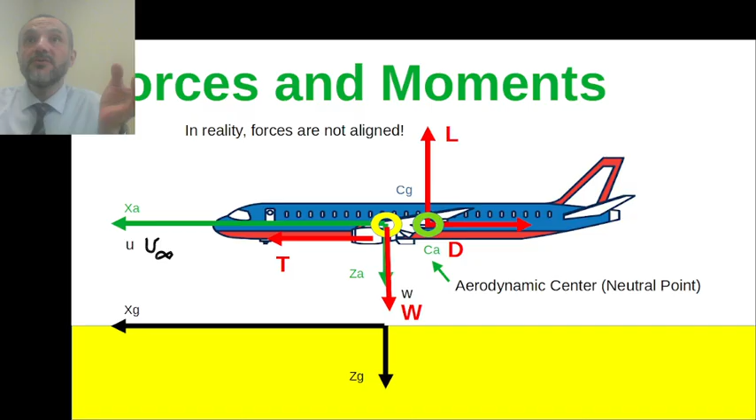Starting where we left off yesterday, we quickly reviewed the coordinate system, the forces and moments acting on the airplane, and reminded ourselves of things like the static margin and that the position of the CG is always changing, but as long as it's within a safe zone, it's okay, we can still fly.

The characteristics of the flight will change with the change of CG position, but it will not become catastrophic. I'll start with the lift of the whole airplane, but because we may come from different backgrounds, or the previous professor used a different approach, I'll quickly review what we already know about lift so we can build on it and do calculations for the whole airplane. This is what we'll try to do today, inshallah, and it will probably extend to next week to cover more of what you already know, but collect it together.

Generally speaking, when air or any fluid flows over any given body, forces start to be created due to changes in pressure on one hand, and on the other hand, some are created because of viscosity. In many cases we just ignore viscosity because it's quite low in air, but probably you already know that without viscosity, we wouldn't have been able to fly.

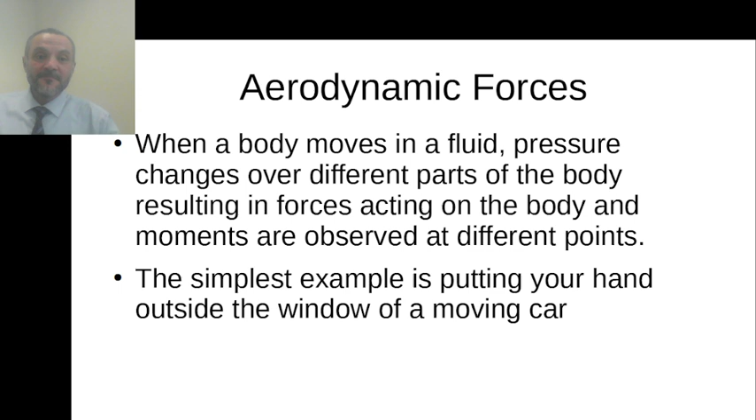Let's imagine you're trying to put your hand outside a moving car. I'm not sure whether the law allows this or not, but even if it doesn't, as a human being you have the right to try it. It's a very nice experience most of us have had, whether as children or adults.

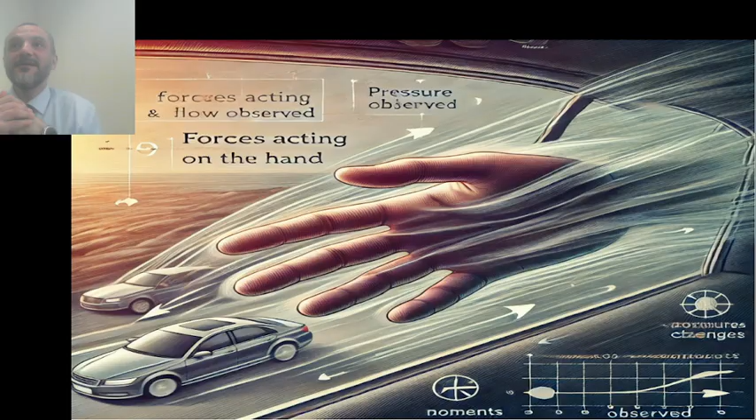Until today I like very much to get my hand outside the window and play around with moving my hand in the air. What happens is that as the air passes around your hand, it starts pushing on some parts more than others. When it pushes on these parts, that's what we call an increase in pressure. On the other parts, the velocity increases, and due to Bernoulli's equation, pressure decreases, so a negative change in pressure occurs. Adding these up, a positive increase on one side and a negative increase on the other add up to a total force.

The fundamental force for any flow of fluid on any body is drag. This is sad for us, we hate drag usually, all the time. But whenever any body is moving in any fluid, drag is created.

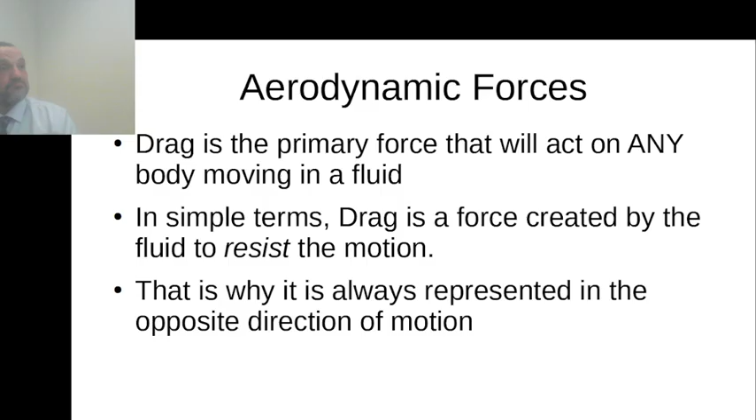Is it associated with lift? Doesn't have to be. So drag is the fundamental force, we cannot get rid of it.

Drag is defined in many ways, but the one we care about in flight and aerodynamics is the force that's parallel to the airflow and in the direction of the airflow. So if it's in the direction of the airflow, it's against the direction of motion of the body, right? That's what pushes your hand if you put it completely against the airflow, it pushes your hand backwards. This is what resists the spoon while you're trying to mix sugar with your tea or coffee, that's against the flow.

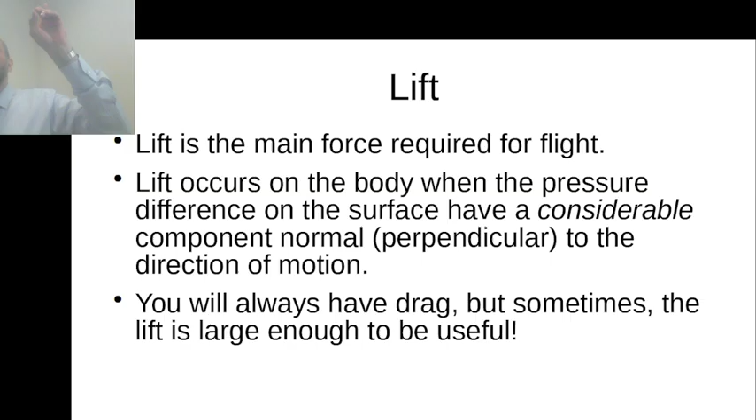The other force, which we always hope to have as much of as possible, is lift, because lift is what's responsible for flight. Without lift there is no flight. The definition of lift, as per what Sir George Cayley defined in 1799, is that it's the resultant of the force normal, or perpendicular, to the airflow. This is what we are seeking all the time, and that's what's used to raise or pull the body against gravity.

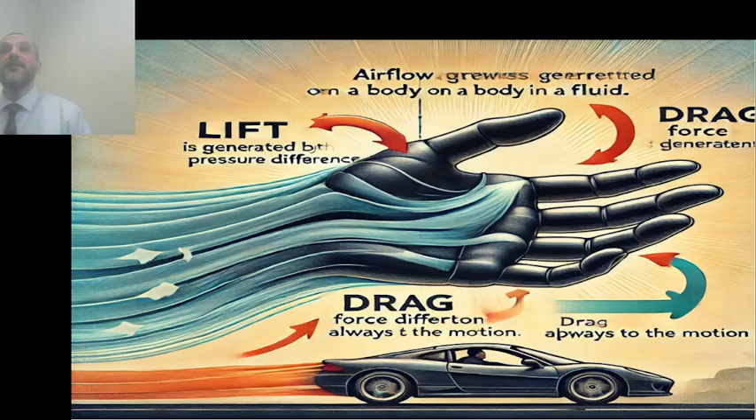Well, does it always pull it against gravity? You may want to create negative lift, right? But generally speaking, when we say lift, it's supposed to be upwards. Negative lift exists, yes, negative lift is useful, believe it or not. As we will see in detail, sometimes we deliberately use it to create negative lift.

Okay, so the wing, on the other hand, is any body that's designed with the purpose of mainly creating lift.

Of course, for generalization, we can assume that anything moving in any fluid can be called a wing. But this is too broad of a definition to be useful for us. When we say wing, we are talking about some geometry that's usually slender, thin, and tall, and its main length, which we call the span, is usually perpendicular to the direction of flight.

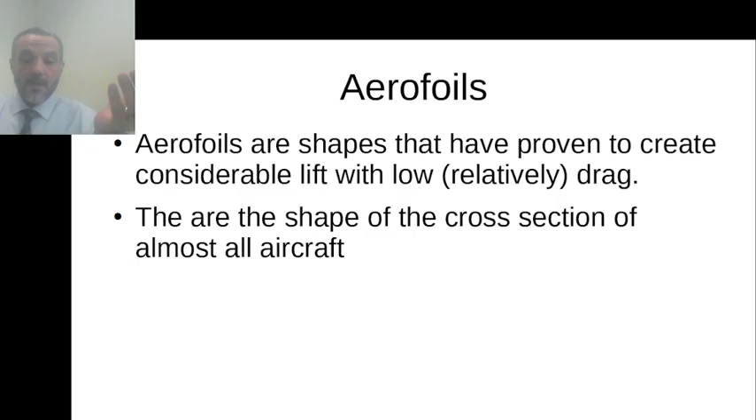This is again a narrow view of an airfoil, because for example, if we're talking about supersonic flight, many of the supersonic airfoils are in a diamond shape. But for subsonic flow, which is most of the aircraft, a diamond shape is not really that good. We need something rounded from the front and pointed from the back. Nevertheless, the broadest definition is that any wing cross section can be called an airfoil.

To draw an airfoil, given the four-digit nomination of the airfoil, you can get the airfoil right away.

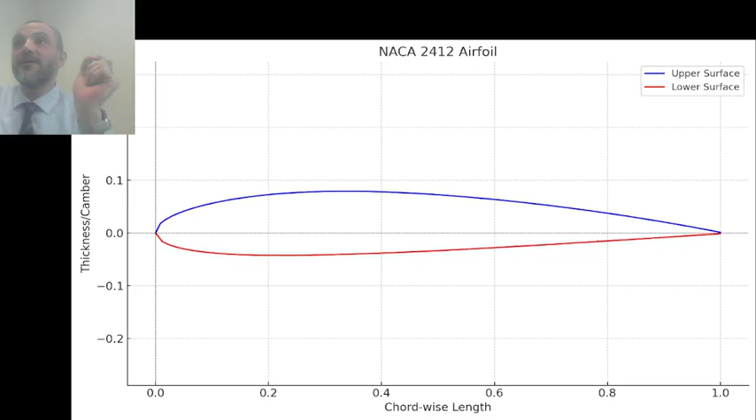There are a lot of software packages, small ones, that are very useful when analyzing airfoils. Probably the one that I love, I've been using for ages now, is Java Foil. Although sometimes it's hard to get it running, but as soon as it gets running, it's very nice in analyzing 2D and 3D wings. If you can get it on your computer, it would be a very nice tool.

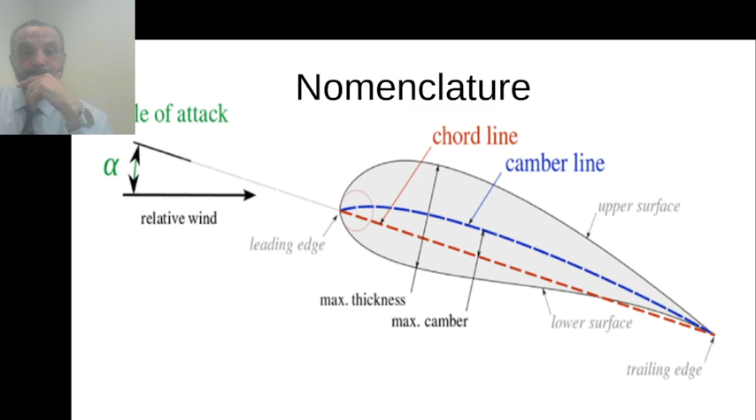I will not be repeating here what you already know about airfoils, but let me just stop and focus on one thing: the maximum lift. The maximum lift of an airfoil is something that's always associated with any airfoil. As you increase the angle of attack, you increase the coefficient of lift, but up to a limit. When you reach that limit, the coefficient of lift starts dropping.

Practice and computational fluid dynamics says that it will not be dropping forever. It will grow up again at a higher angle of attack, but that's useful for severe maneuvers for fighter aircraft. Most of our work will be focused on regular flight, either small aircraft or commercial aircraft. However, this is important to know for any wing, in order to recognize how much lift that given wing can produce. Without knowing that, you can reduce your speed forever.

Remember in the previous course, flight mechanics, you learned about V minimum, the minimum speed you can fly at. How would you identify it? By getting the maximum lift coefficient and the weight, and by that you can find what is the value of my minimum speed, below which the airplane would fall.

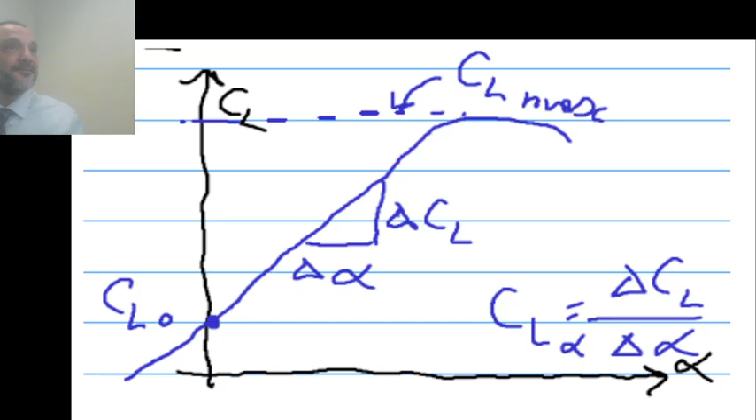It just means that the total lift I'm producing by my airplane is less than the weight. If it's less than the weight, what will happen? I will start losing altitude. I'm not falling, I'm just landing, baby. Although it's not a good idea to land at your stall angle of attack, okay? But I'm still flying, right? Remember that.

Okay, again, let's quickly review now, go from airfoil to the cross section to what we call a 3D wing. A finite wing is what we already use for flight anyway. What happens with a finite wing?

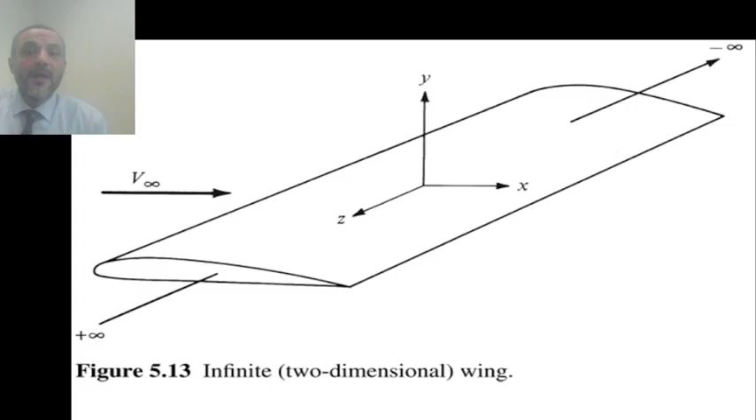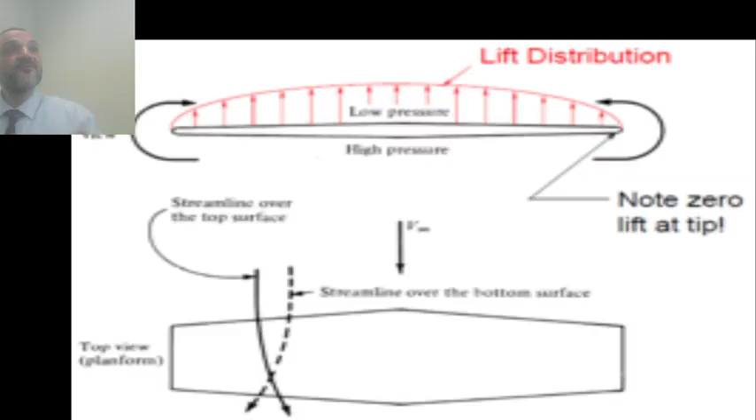One thing that causes a lot of changes is the wingtip vortices, right? It reduces the amount of lift produced by the wing. It creates a change in the effective angle of attack. It produces wakes that create downwash and upwash, which affect everything that's flying behind the wing.

And it's powerful enough to hurt someone, or even, if it's a 747 and you are very unlucky to get in the wake of a 747, even if you're riding a bus, the whole bus will go around and it's not going to be a very nice experience. That's why I would suggest you do not fight the bad guys on the wing of a 747 while it's taking off. Tell Bruce Willis that, please, because I want to meet him just to tell him don't do that again.

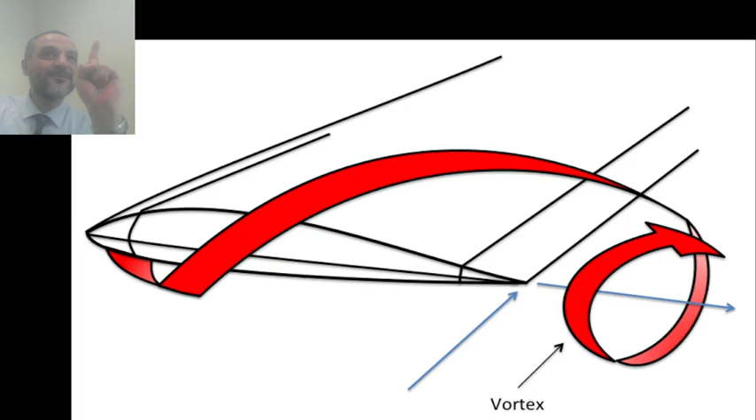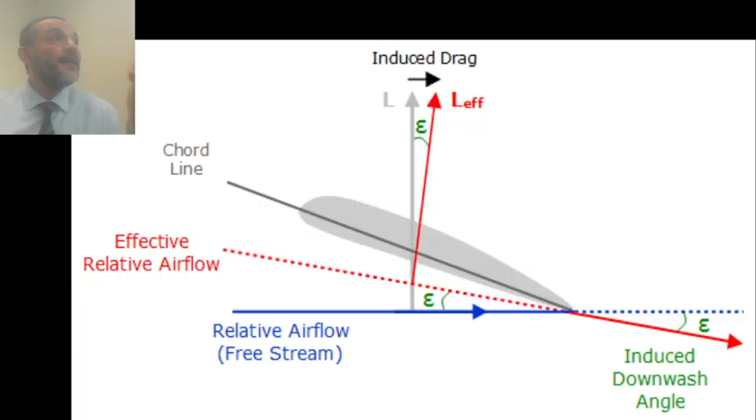Just a reminder: for the wing itself, it's affected by parts of the downwash. That's why the effective angle of attack changes, changing the direction of flow, which reflects for us as two things: a reduction in the lift and creation of what we call induced drag.

I will not spend much time now talking about winglets. You probably know the general idea. Winglets basically reduce the effect of the wingtip vortex, so it increases the efficiency of the wing and reduces the effect backwards as well on the tail.

Now, we quickly reviewed what you already know about airfoils and finite wings. Let's jump to the whole configuration, and for that I'll need to start writing or drawing, and you'll get to get acquainted with my bad handwriting.

Now we have a whole aeroplane configuration with a wing and a wing, right? A big wing and a smaller wing. We usually call them the wing and the tail, or the wing and the horizontal stabilizer, but for aerodynamics, they are both wings.

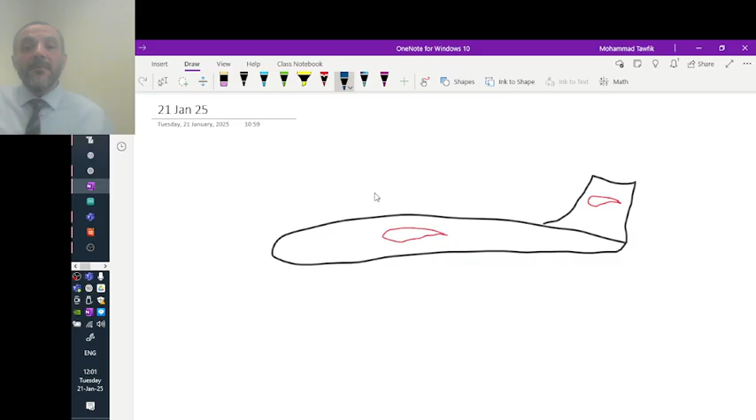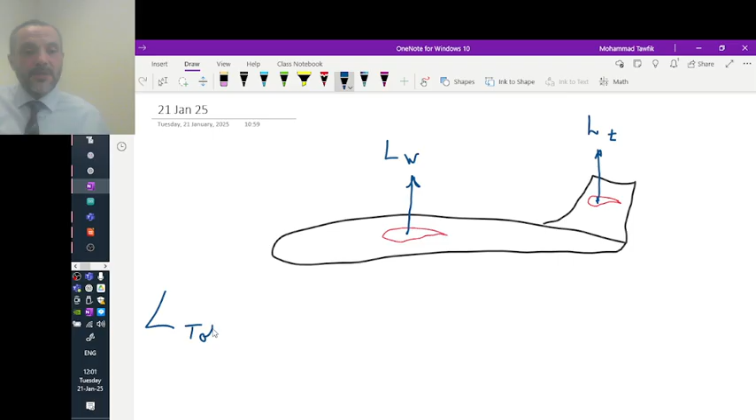I will start by something that's not always done when studying flight dynamics, but I'll just start by talking about the lift generated by the whole aeroplane. For the whole aeroplane, L total, which I will refer to as L from now on, total lift of the aeroplane, I can say that it's generated by the lift of the wing plus the lift of the tail and maybe plus the lift of the fuselage.

Can the fuselage produce lift? It can. Usually quite small compared to the wing and tail, but it can be large enough to use for flight. You have probably heard before about wingless aeroplanes, or flying, or lifting body aeroplanes. But for our case, we will just ignore this for now.

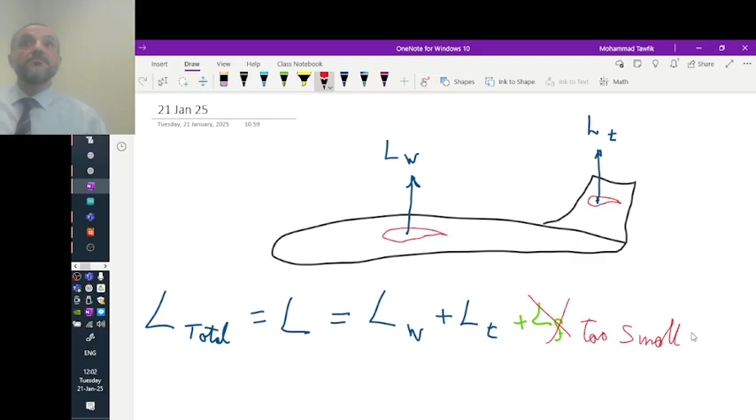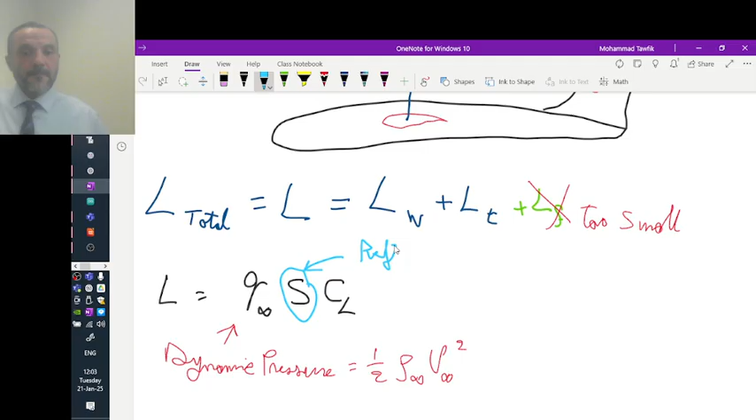The lift of the whole aeroplane is usually known as, or written as, Q infinity S CL, where this is the dynamic pressure, equal half rho infinity V infinity squared, and this is the reference area. For the airplane, the reference area is usually the wing area.

That's by choice. And the most important part probably is the lift coefficient, which is again some combination of the lift coefficient of the wing and the lift coefficient of the tail. But again, it can be generally presented as CL equals CL naught plus CL alpha alpha, where alpha is the angle of attack measured from the body reference axis and the airflow direction.

Similarly, the lift of the wing may be written as Q infinity S wing CL wing. Do you agree? Which can be written as Q infinity S wing times CL naught wing plus CL alpha wing alpha wing.

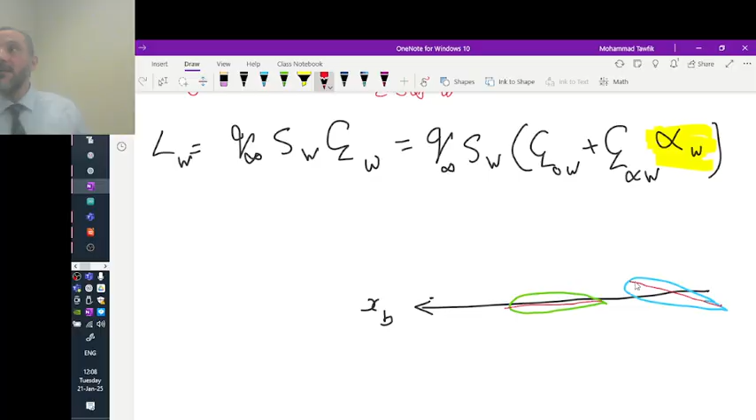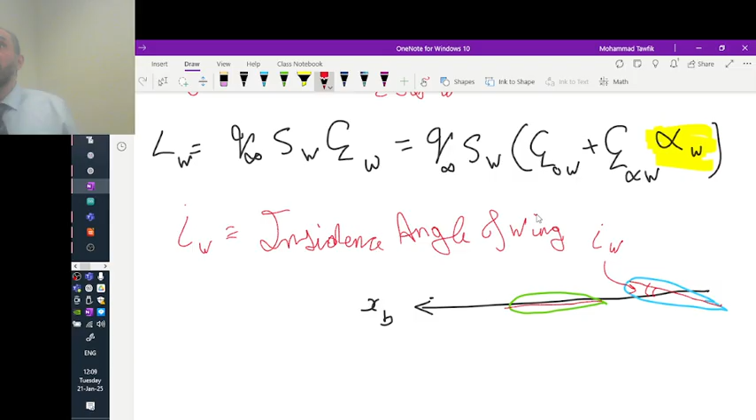So generally speaking, yes, the setting of the wing relative to the rest of the body can force us to say that there is what we call an induced incidence angle - incidence angle of the wing. This incidence angle can be set to 0 by the designer or set to some other value.

Remember, for the wing, like we said last time, we don't have a choice - the reference line of the wing is the chord line, or more generally, the average chord line. But for the airplane, the reference line is a choice. It makes a lot of sense to make it more or less parallel to the chord line of the wing - but more or less, not too much difference.

But still, generally speaking, it may have an incidence angle, which is not related - just to answer the other point of view - to where the wing lies vertically relative to the axis. Maybe a high wing with zero incidence, or a low wing with negative incidence. So the incidence angle is measured between the two lines: the chord line of the wing and the airplane reference line, or in other references, the fuselage reference line. I prefer the airplane reference line.

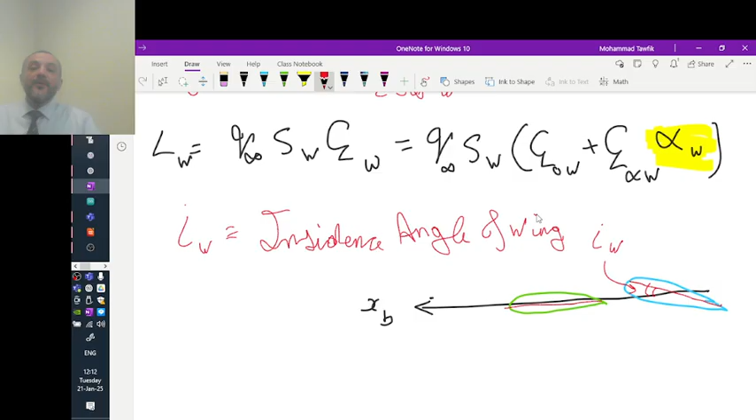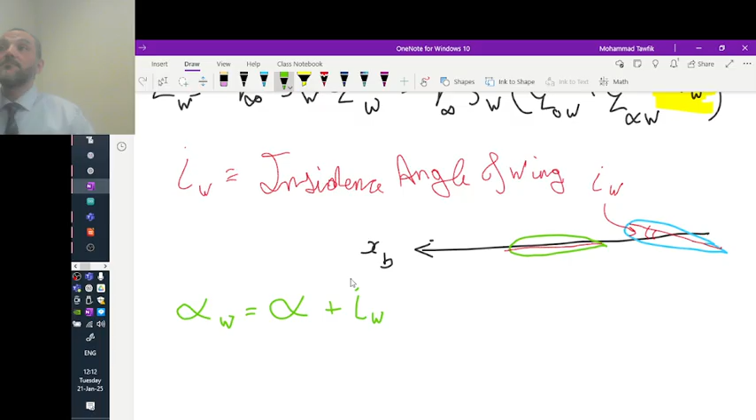Actually, now we are going to say also that the angle of attack of the wing doesn't have to be equal to the angle of attack of the airplane, right? So yes, alpha wing is different from alpha. And generally speaking, we will say that alpha wing is equal to alpha plus i wing.

Similarly, when we write the lift of the tail, we say Q infinity S tail CL tail, right? Wrong. I use every equation here to introduce something new - not new, at least a reminder. I left a space between Q infinity and S tail. Why did I do that?

Yeah, because you have a very bad handwriting, so you're not really regular on how you write, right? Maybe yes, but this time, no. What happens? What's the difference? Come on, it's still Q infinity S CL, right? Why should the tail's lift be different from the wing's lift?

It's in the wake of the wing. It can... that's my answer. Well, you're not on the wrong track - you're more or less on the right track.

So the purpose is for lifting. The purpose is just for stabilizing, not to... It is there to be lifted - it is a lifting surface, so it may produce lift or may not. So generally speaking, it may produce lift, right?

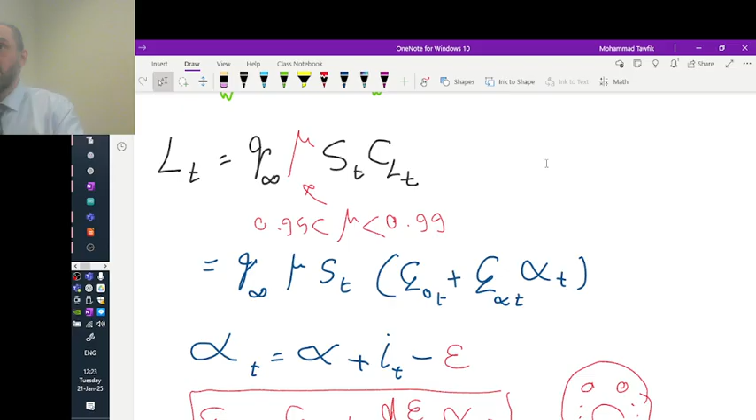Partly lucky for you, for this lecture and the following one, I will deliberately, against all flight dynamics rules, ignore epsilon for 2 lectures. Only 2 lectures. So, epsilon is there, there is downwash, and it is significant, not like what I said about mu. Mu is large enough to be considered 1, but epsilon is not small enough to be ignored. Is that clear? But for the purpose of this lecture and the following one, I'll temporarily ignore it, so that no one would say Mohammad Tawfik is teaching us wrong. No, I'm deliberately doing this for a purpose that I hope will be clearer for everyone in a small while, actually by tomorrow, by next lecture, inshallah. Okay, so for now...

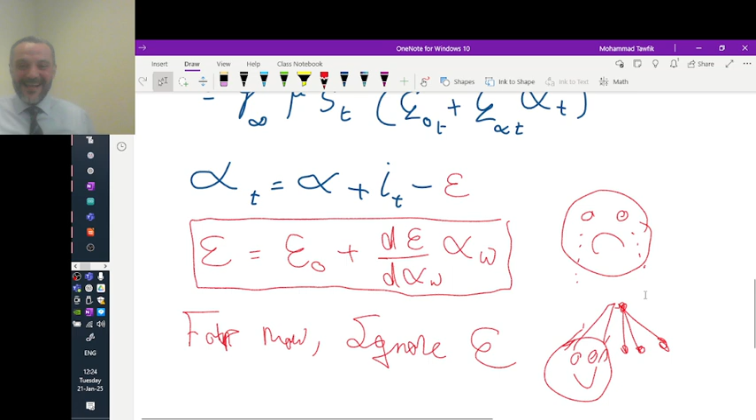Okay, so now at last we may write that the total lift of the aeroplane is equal to Q infinity S CL, which is equal to Q infinity S wing CL wing plus Q infinity mu S tail CL tail.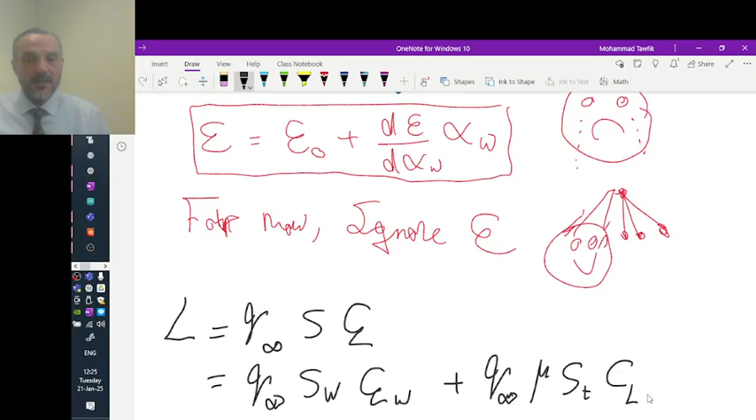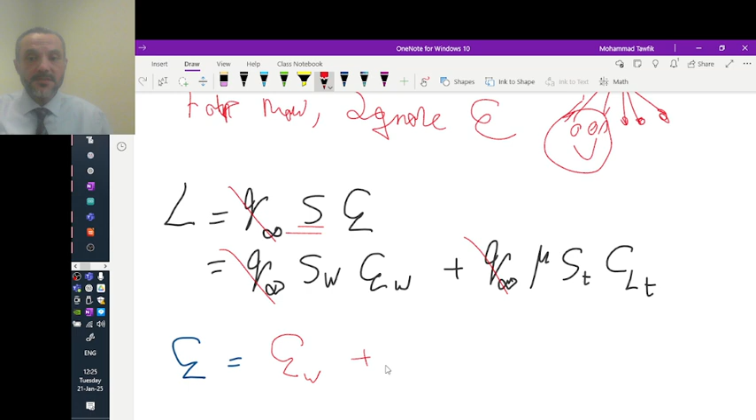This gives us the first relation we were looking for, relating the total lift coefficient of the aeroplane to those of the lifting surfaces. Dividing the whole equation by Q infinity and then by the reference area, which by choice is the wing surface area, we end up with CL equals CL wing plus mu S tail over S wing CL tail.

From this relation we don't come up with a lot of conclusions, probably only one, which is that most of the lift coefficient of the whole airplane is coming from the lift coefficient of the wing. This is not a surprise for any of us. We know the wing is the main lifting surface, so regarding the aerodynamics, it should have the largest contribution. Okay, so far so good.

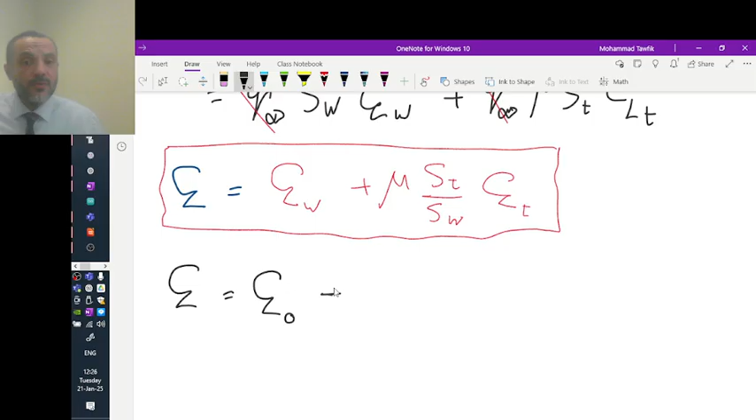Let's now try to find those coefficients. We said that CL, usually as a linear relation, can be presented as CL naught plus CL alpha times alpha. To get this relation I need those two values, the slope and the y-intercept, to get the commonly known CL alpha relation. Okay, how do we get that?

We need to expand the CL of the wing and the CL of the tail in terms of the constants and the angle of attack, and collect all terms that are not related to alpha, considering them to be CL naught, the constant term. All the other terms related to alpha will be collected in the slope term CL alpha. Here we go.

Let's write the CL of the wing, which is CL naught wing plus CL alpha wing times alpha wing, which is alpha plus I wing. And the other part is mu S tail over S wing multiplied by CL tail, which is CL naught tail plus CL alpha tail multiplied by alpha tail, which is alpha plus I tail minus epsilon, ignore that, we ignored that part.

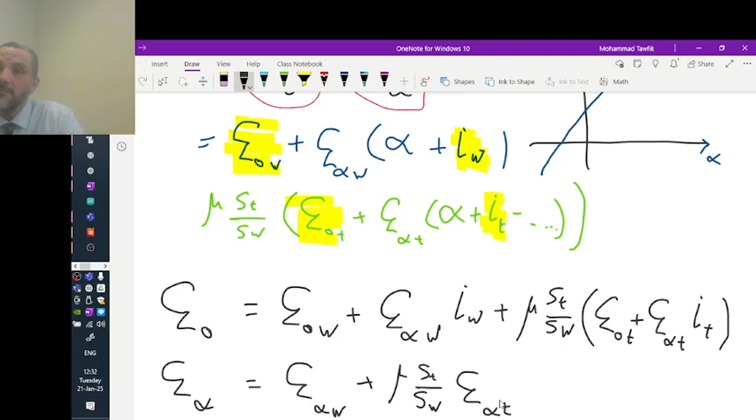So what did we do here in this very simple exercise? I consider it an exercise because basically this is not our objective, we're just trying to get familiar with all the notations. We said, let's try to calculate the total lift and the lift coefficient of the whole aeroplane based on what we know about the wing and the tail. First, we said we will ignore the fuselage, considering the fuselage lift not existing. Then we wrote the total lift as the summation of the two forces, lift of the wing and lift of the tail. That was quite straightforward, there weren't much tricks here.

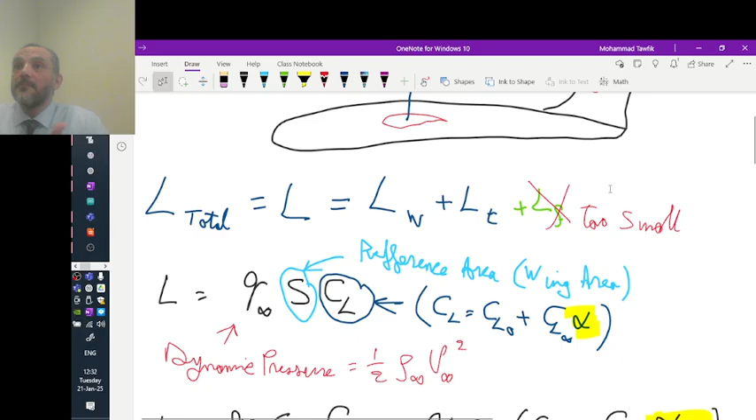Now, when we looked for the coefficient, we said the coefficient is usually a linear relation between the lift coefficient and the angle of attack. So we can assume generally that it is a constant plus the slope times the angle of attack.

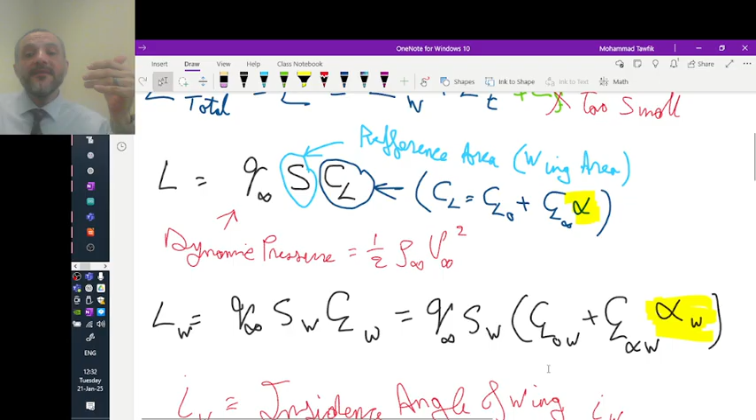Applying this to the coefficient of lift of the whole aeroplane and then applying it to the coefficient of lift of the wing, we realize that the angle of attack of the wing is different from the angle of attack of the whole aeroplane. Okay, that was good.

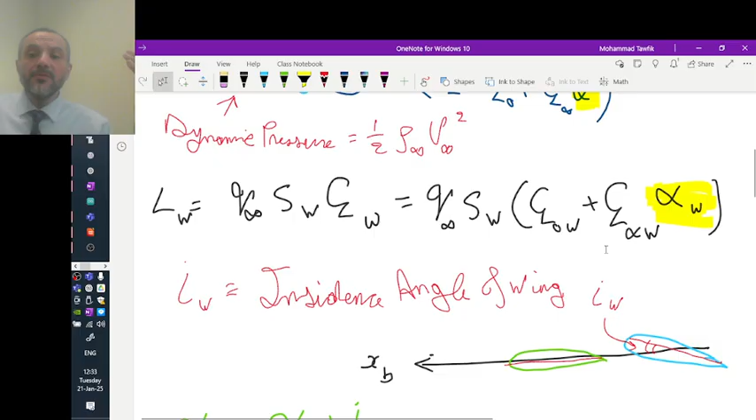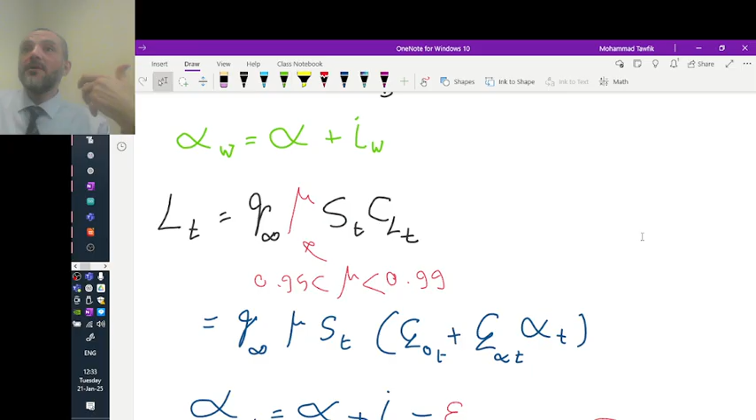Then when we went to the tail, we found that the same applies for the tail, but with two different points. The first is the air slows a little bit, which reduces the dynamic pressure of the air on the tail, and the effect of the downwash changes the angle of attack of the tail by a significant amount, which we called epsilon.

So eventually we said alpha of the tail, the angle of attack of the tail, will be equal to the angle of attack of the whole airplane plus the incidence angle of the tail minus the downwash angle of the tail. Okay, let's keep it aside for a while.

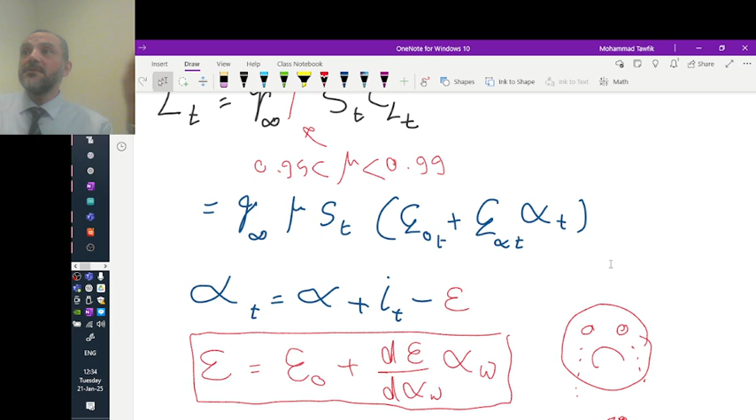Now, putting everything together, we were able to write down the total lift coefficient of the aeroplane as a weighted summation of the lift coefficient of the wing and that of the tail.

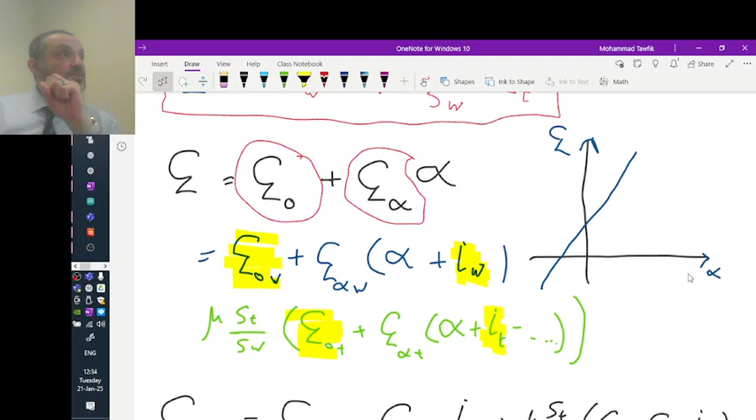Separating the constant parts and the parts that have alpha in them, we got finally a constant that can present the y-intercept of the whole aeroplane, CL naught, in terms of few things related to the wing and the tail. And finally, we got the slope, or the rate of change of lift coefficient with angle of attack of the whole aeroplane, in terms of those of the wing and the tail. So this is the basic idea.

This exercise is quite useful for the next step, which is we want to start investigating what's happening in the moment. The moment of the airplane is an important thing when we are talking about stability.

When we try to analyze it, we will apply more or less the same process. Actually, in other literature, you will find it introduced in a different way, but stick to my way for now, in order for me to be able to emphasize a few points that I want you to see.

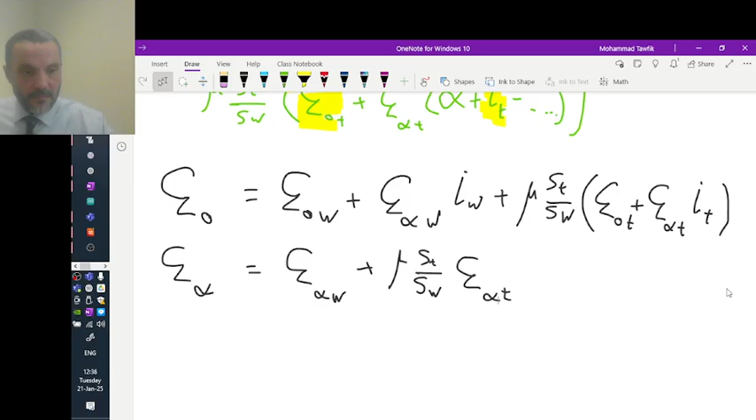Okay, it's time to talk about stability then. What is stability? What would you call a stable body?

A body which is not disturbed, when it's not disturbed, is stable. A body that has a tendency to come back to normal. We all are under disturbance, all the time. Sometimes we feel the disturbance, sometimes we don't feel it, but it's there.

For example, in seismology, which is something very far from what we do, seismologists, people who work with earthquakes, tell us that the crust of the earth is constantly vibrating. The vibrations that we call earthquake are basically the same vibrations, but with larger amplitude. So we're living in a continuous earthquake, right? But it's kind of not disrupting our lives. When the amplitude of it is large enough, then...

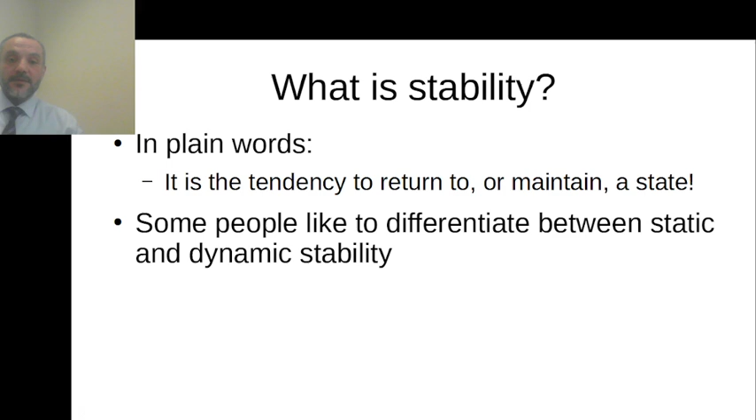So the very commonly used way to explain stability is the ball in a bowl example. If the ball is on the concave side of a bowl, if you disturb it, it has a tendency to go back. If it's on the convex part of a bowl, if you disturb it, it will run away. Both starting positions are equilibrium. Theoretically speaking, you can stay there forever.

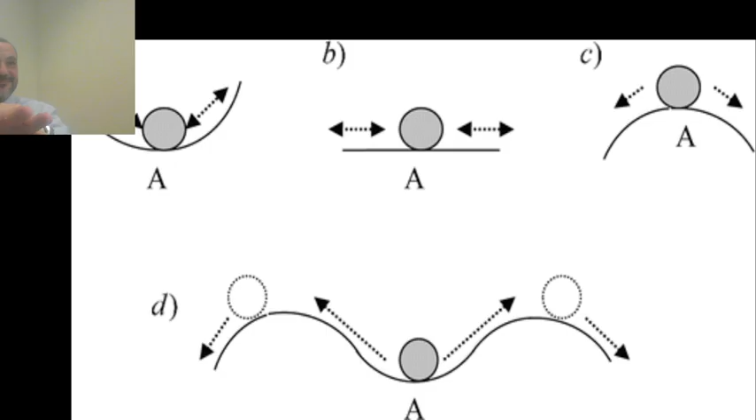The differentiation between stable equilibrium and unstable equilibrium is when disturbance occurs. Actually, here there is a philosophical point of view, and I will not impose it on you. I personally don't like to distinguish between what's called dynamic equilibrium and static equilibrium. You will find it in a lot of literature all around you, so I will explain it to you. However, for me, equilibrium is equilibrium. Static or dynamic is just equilibrium.

Usually what's referred to as dynamic stability or dynamic instability is related to vibration, or a continuous change of state. When the system is stable, what happens is that this continuous change of state or vibration fades away, it dies out. This fading is due to some kind of damping or control, something that absorbs some of the kinetic energy of the system.

To get it back to its original equilibrium, like a pendulum. When you start a pendulum, although it may take a long time, eventually it will stop. Why did it stop? Because there is mechanical friction and aerodynamic friction that are absorbing energy from it all the time. What happens in a more complex system is that it may not have the tendency to go back to its original state while vibrating.

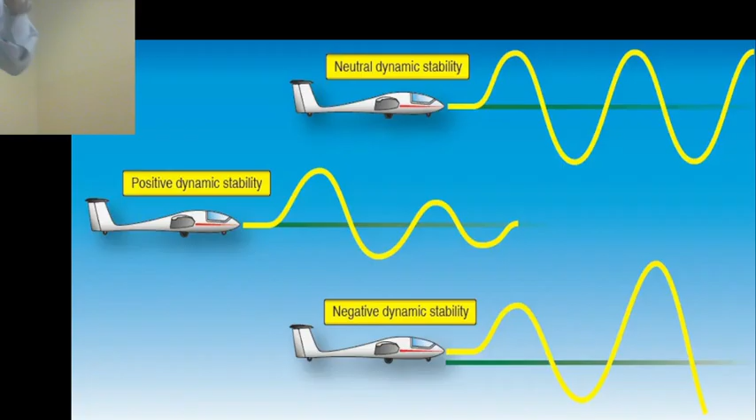Now let's try to understand how a horizontal stabilizer stabilizes the aeroplane in longitudinal flight. Just let's focus on the horizontal stabilizer. Now we are having two wings, a bigger one and a smaller one, but both are rigidly attached to what's called an aeroplane, and they are flying.

Disturbance occurs all the time. Sometimes we notice it, sometimes we don't. Now, when some disturbance happens, say in the form of upward flow of the air, so you're flying at a constant speed, but suddenly you get an uprising air at a speed of 30 meters per second, a huge amount. Air is blowing up. What will happen to the airplane?

Right, so it makes sense. The whole airplane will go up. Okay, let's now turn our attention from the whole airplane to the two aerodynamic surfaces we have. What is going on with the wing?